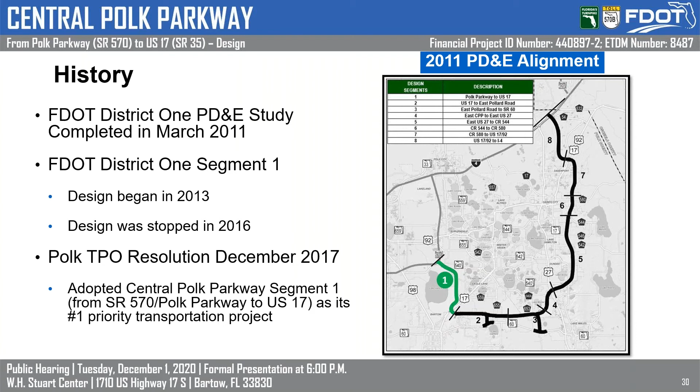In 2017, FDOT District 1 transferred the Central Polk Parkway project to Florida's Turnpike Enterprise. In 2018, Florida's Turnpike Enterprise began design on the Central Polk Parkway from Polk Parkway to US Highway 17. Through the design phase, the project team evaluated right-of-way requirements, access management on State Road 540 and US Highway 17, and environmental impacts within the project corridor.

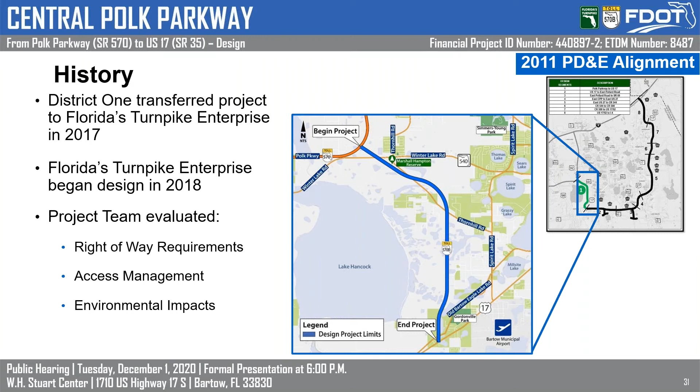During the PD&E study, numerous alternatives and their social and environmental effects were examined. Currently, we are in the design, reevaluation, and public hearing phase of the project. Changes to environmental impacts as a result of design activities are documented.

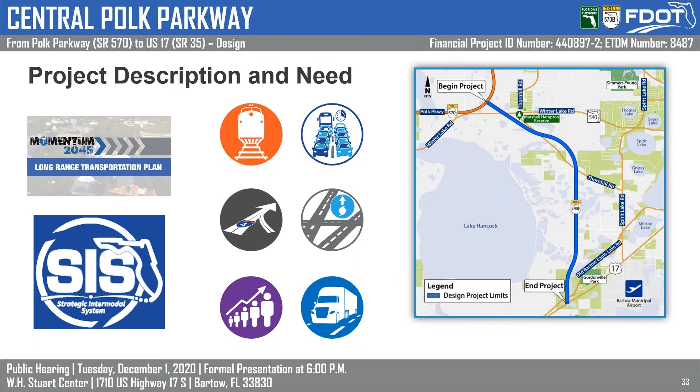The new roadway will improve regional north-south connectivity, enhance freight mobility and economic competitiveness, improve emergency evacuation times, and accommodate future population growth and land use changes.

Central Polk Parkway is a new 4-lane tolled roadway extending from Polk Parkway to US Highway 17. Please note that the north direction is oriented to the left, as shown by the symbol on the left side of the graphic. Central Polk Parkway will include a system-to-system interchange at Polk Parkway, a diamond interchange at Winter Lake Road, locally known as State Road 540, and an at-grade intersection at US Highway 17. The corridor has 2 preferred pond sites, 3 preferred floodplain compensation sites, and 1 regional stormwater management location.

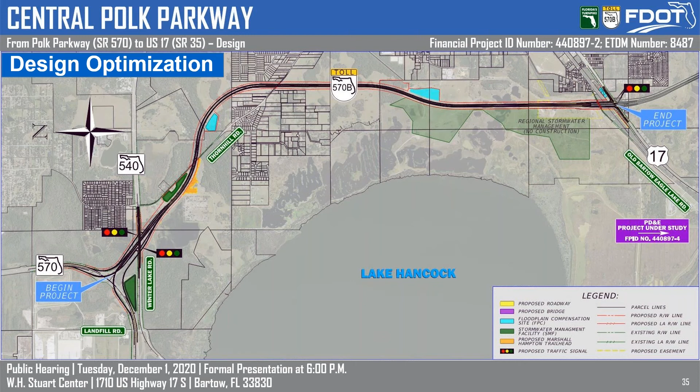Through the design phase, the project team optimized the FDOT District 1 PD&E alignment. Optimization included reducing right-of-way impacts to the Polk County landfill, providing a new trailhead for Marshall-Hampton Reserve to maintain trail connectivity, optimizing the bridge crossing over Thornhill Road to reduce bridge costs, reducing right-of-way impacts to homeowners near the County Walk community, realigning the southern 2 miles of roadway to minimize environmental impacts, and realigning the US Highway 17 interchange to the east to avoid unsuitable soils on the south side of US Highway 17.

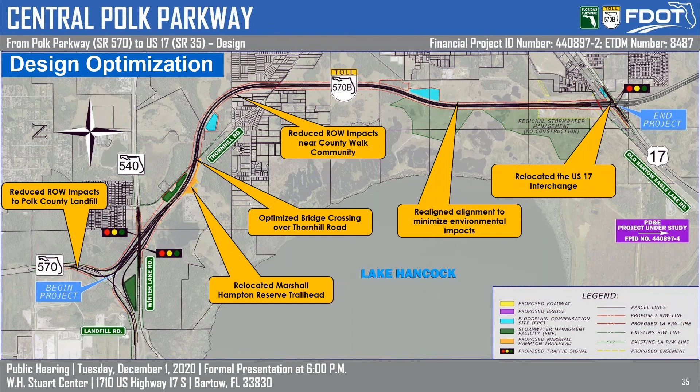The typical section for the project corridor provides 4 12-foot wide travel lanes, 2 in each direction, with 8-foot wide shoulders on the inside, 12-foot wide shoulders on the outside, and separated by a 74-foot wide median. The proposed limited access right-of-way for the road will be 310 feet in width. Stormwater facilities will be constructed along both sides of the roadway.

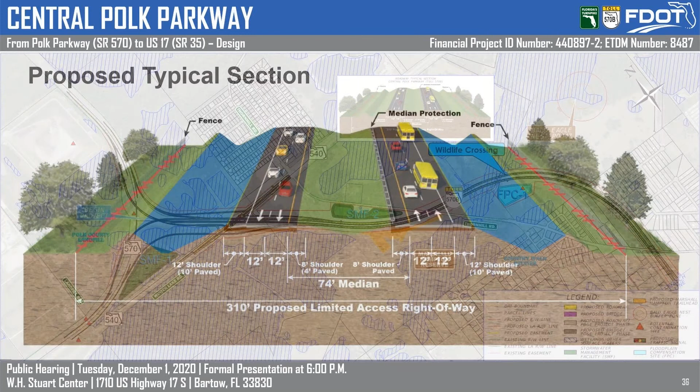At the west end of the project, a new system-to-system interchange is being proposed to connect the existing Polk Parkway to the new Central Polk Parkway. A new diamond interchange is being proposed at State Road 540 that will connect Polk Parkway to the west and Central Polk Parkway to the east.

As the alignment heads east, a new bridge will be constructed over Thornhill Road. The Marshall-Hampton Reserve Trailhead will be relocated south of its current location. As the Central Polk Parkway alignment heads further east, a second mainline bridge will be constructed over Thornhill Road.

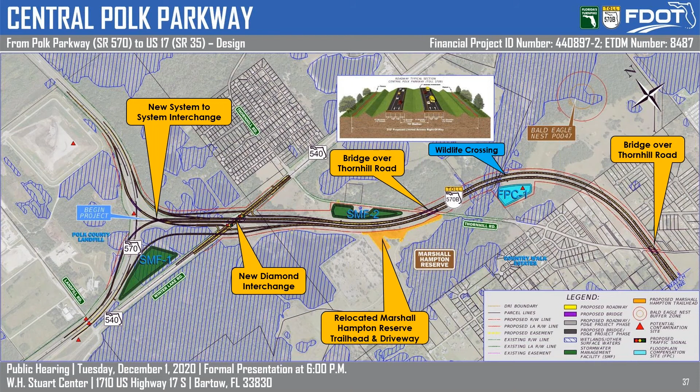The proposed interchange between Polk Parkway and Central Polk Parkway will be a new system-to-system interchange with flyover ramps to connect the Polk Parkway to the Central Polk Parkway.

The interchange at State Road 540 will be a diamond configuration where new ramps will provide access to the Polk Parkway to the north, as well as ramps to access the Central Polk Parkway to the east from State Road 540. Currently between the Polk Parkway and State Road 540, there is an existing ramp toll plaza.

This plaza will be relocated under a separate Florida's Turnpike Enterprise contract. Florida's Turnpike Enterprise is planning to construct toll gantries on the Polk Parkway to replace the ramp toll plaza.

Improvements on State Road 540 include a half-mile of roadway reconstruction, median modifications, signalized intersections, and highway lighting within the interchange. The projected level of service at the State Road 540 ramp terminal intersections is B or better in the 2045 design year.

Level of service is a term used to qualitatively describe the operating conditions of a roadway based on factors such as speed, travel time, and delay, using the letters A through F, with A being the best and F being the worst.

The existing full median opening to access Polk Parkway will be replaced with 2 signalized full median openings to access the new ramps. The existing directional median opening east of the interchange will be closed.

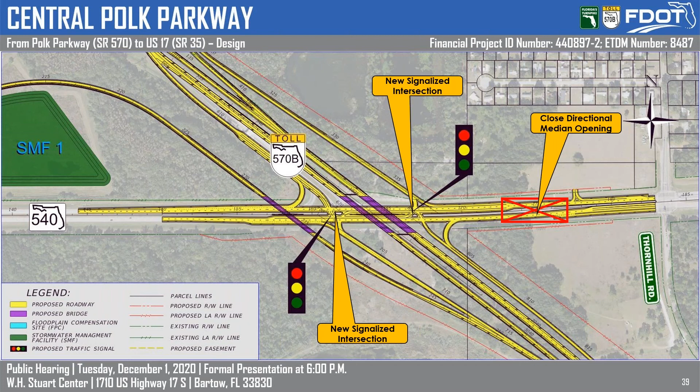As the roadway continues east, a new all-electronic tolling site will also be constructed east of Thornhill Road. 2 new bridges will be constructed over the existing water features.

Closer to US Highway 17, 2 additional bridges will be constructed over Old Bartow Eagle Lake Road. These bridges will help to avoid sensitive utilities in the area.

Central Polk Parkway will terminate at US Highway 17 with an at-grade signalized intersection. With the current Central Polk Parkway alignment, there will be no construction impacts to the bald eagle nests.

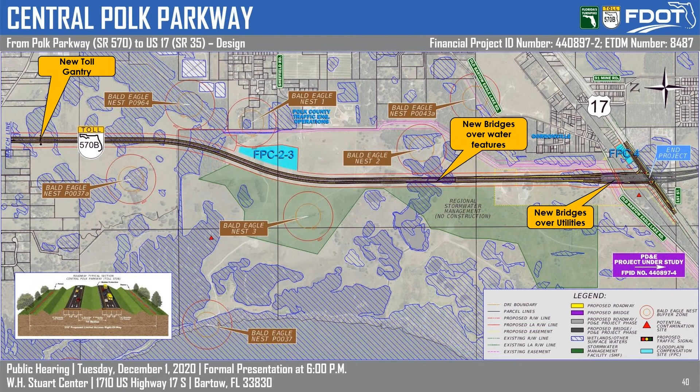Improvements along US Highway 17 include widening to accommodate new turn lanes for access to the new ramps to and from Central Polk Parkway. Also included are median modifications, signalized intersections, and highway lighting within the at-grade intersection.

The projected level of service at the U.S. Highway 17 ramp terminal intersections is D or better in the 2045 design year.

The existing full median opening within the at-grade intersection will be closed and replaced with 2 signalized full median openings to access the new Central Polk Parkway ramps.

The existing U.S. Highway 17 full median opening, which is west of the at-grade intersection and provides access to First Street, will be replaced with a directional median opening.

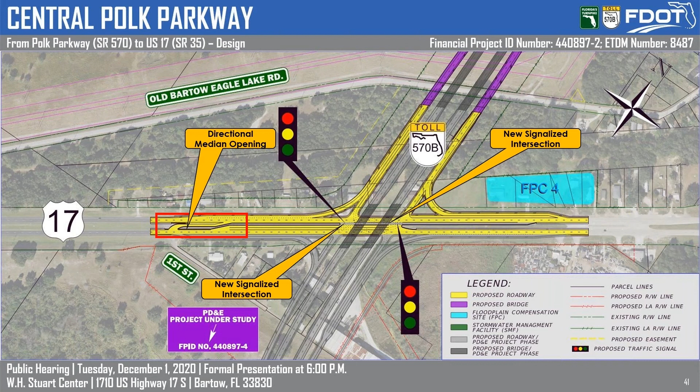The U.S. Highway 17 intersection will be constructed to accommodate a full interchange and a future eastward extension of the Central Polk Parkway. The future extension is currently being evaluated under a PD&E study.

The next several slides will illustrate all of the new movements within the interchange.

Polk Parkway to eastbound Central Polk Parkway: eastbound and westbound Polk Parkway traffic will exit on the new ramps to eastbound Central Polk Parkway.

Westbound Central Polk Parkway to Polk Parkway: traffic traveling westbound on Central Polk Parkway will exit on the new ramps and merge onto eastbound or westbound Polk Parkway.

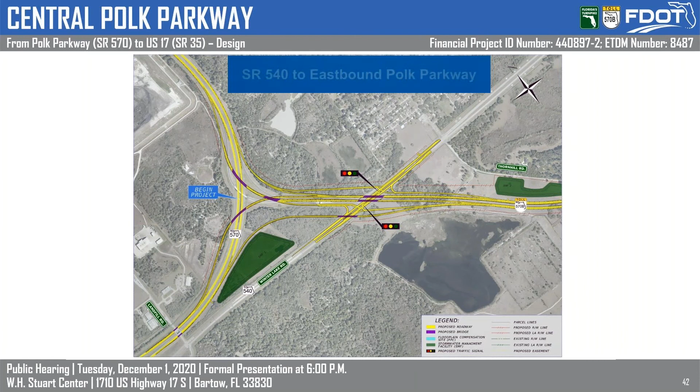State Road 540 to eastbound Polk Parkway: eastbound and westbound State Road 540 traffic will turn onto the entrance ramp to merge onto eastbound Polk Parkway.

State Road 540 to eastbound Central Polk Parkway: eastbound and westbound State Road 540 traffic will turn onto the new entrance ramp and merge onto Central Polk Parkway towards U.S. Highway 17.

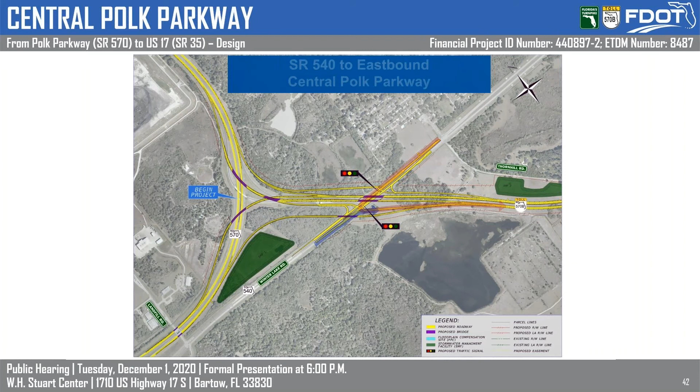Westbound Polk Parkway to State Road 540: traffic traveling westbound on Polk Parkway will exit on the new ramp and turn east or west on State Road 540.

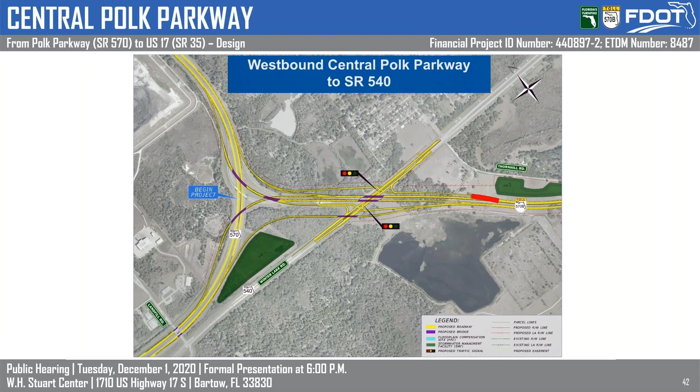Westbound Central Polk Parkway to State Road 540: traffic traveling westbound on Central Polk Parkway will exit on the new ramp and turn east or west on State Road 540.

Westbound State Road 540 to westbound Polk Parkway: westbound State Road 540 traffic will travel west through the new interchange at State Road 540 and utilize the existing entrance ramp located west of Landfill Road.

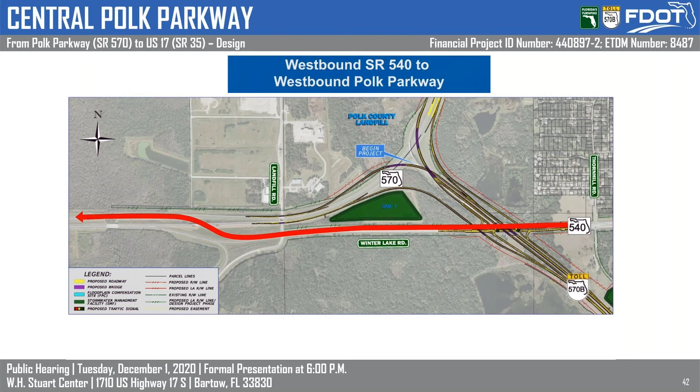Now we would like to discuss some differences between the original PD&E study and the current design as shown in the overview. The yellow alignment represents the 2011 PD&E alignment, and the blue represents the current design alignment.

Through the design phase, several enhancements were evaluated and incorporated into the project corridor. Focus areas 1 and 2 highlight the changes to the flyover ramps within the Polk Parkway interchange and the reconstruction of State Road 540. Focus areas 3 and 4 identify the realignment areas of the Central Polk Parkway.

Focus Area 5 shows the relocation of a future U.S. Highway 17 interchange.

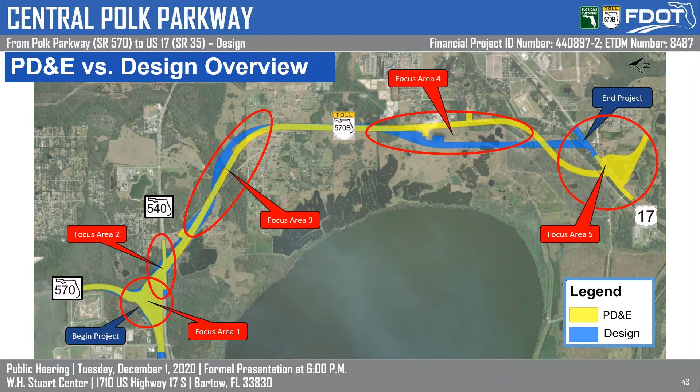In looking at Focus Area 1, the eastbound Polk Parkway exit ramp was modified from the PD&E study to help alleviate driver confusion and improve traffic operations. The PD&E study maintained the existing toll plaza. Under the current design, the existing toll plaza will be relocated under a separate Florida's Turnpike Enterprise project, allowing the new interchange to occupy its space and reduce the right-of-way footprint.

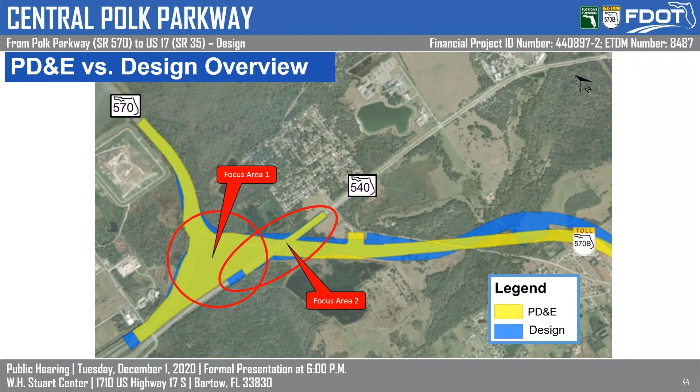The PD&E entrance and exit ramps within the Central Polk Parkway / State Road 540 interchange were originally located in the median. The current design relocated these ramps to the outside of the main line to create a diamond interchange configuration. Focus Area 2 enhances the PD&E study concept by including the full reconstruction of State Road 540 to a high-speed urban typical section, which includes 4 12-foot lanes, curbed 6.5-foot inside shoulders, and 10-foot outside shoulders. Drainage will be accommodated through roadside ditches.

In Focus Area 3, located south of State Road 540, the bridge crossing over Thornhill Road was modified. Several new alignment alternatives were evaluated to optimize the bridge configuration to reduce project costs and provide a safer alignment. Based on this evaluation, the preferred alignment alternative reduced the intersection angle with Thornhill Road, which resulted in an optimized bridge length. These enhancements reduced the overall bridge length over Thornhill Road, provided project cost savings, increased driver sight distance, and reduced the number of impacted properties near the Country Walk community.

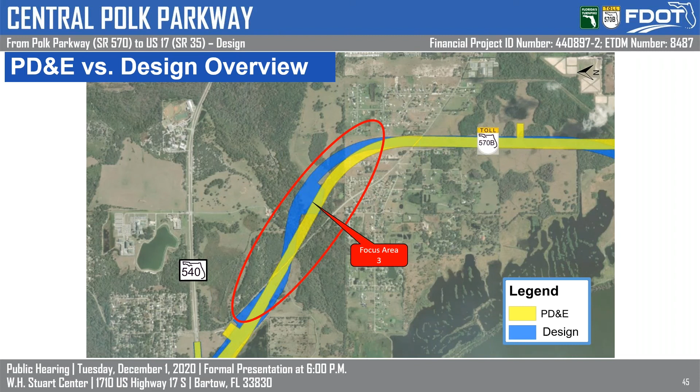Focus Area 4 is located in the final 2 miles of the Central Polk Parkway alignment as it heads east to US Highway 17. The alignment was modified from the PD&E study to avoid impacts to the Polk County Traffic Engineering and Operations Facility, Tampa Electric Company transmission lines, and to reduce impacts to environmentally sensitive areas. Recently, several new bald eagle nests were identified within and adjacent to the southern half of the previously approved 2011 Central Polk Parkway PD&E study alignment.

2 identified nests were being directly impacted and would require an eagle nest incidental take permit. To avoid adversely impacting the bald eagle, several alignment alternatives were developed and evaluated against engineering and environmental criteria to determine an optimized solution. Based on this evaluation, approximately 2 miles of the alignment were shifted to the west.

Focus Area 5 is the intersection of the Central Polk Parkway and US Highway 17. The PD&E study interchange was moved approximately 2,200 feet to the east to avoid an identified unsuitable soils location on the south side of US Highway 17 and to align with the future construction of another project currently in the PD&E stage. The optimized design is a diamond interchange configuration instead of a cloverleaf interchange. This modification reduces the interchange footprint right-of-way need, wetland mitigation, and roadway embankment.

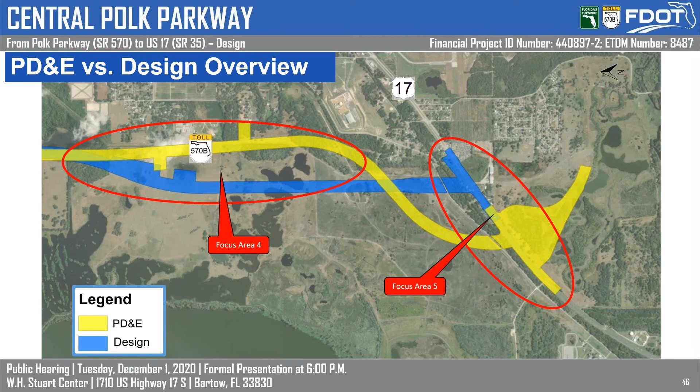One of the unavoidable consequences on a project such as this is the necessary relocation of families or businesses. On this project, we anticipate the relocation of 14 residential and 1 non-residential sites. All right-of-way acquisition will be conducted in accordance with Florida Statute 339.09 and the Federal Uniform Relocation Assistance and Real Property Acquisitions Policies Act of 1970, commonly known as the Uniform Act.

If you are required to make any type of move as a result of a Department of Transportation project, you can expect to be treated in a fair and helpful manner and in compliance with the Uniform Act. If a move is required, you will be contacted by an appraiser who will inspect your property. We encourage you to be present during the inspection and provide information about the value of your property. You may also be eligible for relocation advisory services and payment benefits.

If you are being moved and you are unsatisfied with the department's determination of your eligibility for payment or the amount of that payment, you may appeal that determination. You will be promptly furnished necessary forms and notified of the procedures to be followed in making that appeal.

Currently, the Central Polk Parkway is in the design stage that began in March 2018. A public information meeting was held in 2019, where the public provided input which was considered in the ongoing design. Right-of-way acquisition is from spring of 2020 to 2022. Final plans are anticipated to be completed in summer 2022, and construction is anticipated to begin in late 2022. The design project schedule is tentative and subject to change.